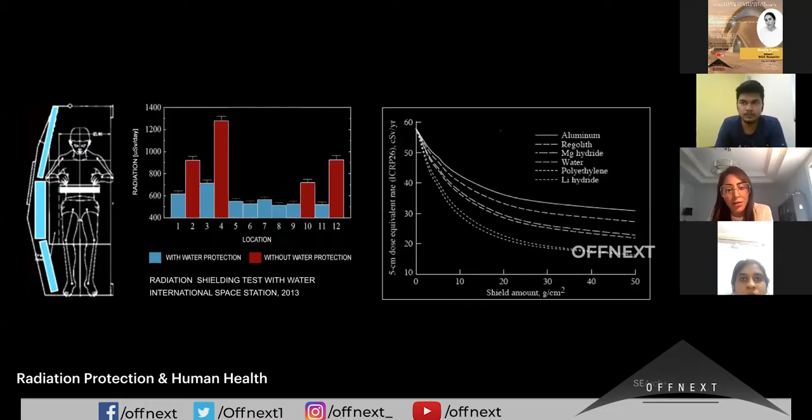So within the Mars Ice House concept, we introduced a vertically oriented lander that lands on the surface of Mars. We introduced two redundant ice shells that are 3D printed on the inside of an inflatable precision manufactured, we said it would be an ETFE membrane. And then from there, we introduced programming that sort of expanded from this central vertically oriented lander. And I will show you some of these areas now.

So at the very top floor, we introduced a wardroom and a galley. And we introduced a concept for vision windows where we can have thinner parts of the ice shell where the astronauts can look out to the Martian landscape. Here's a view of Ice House from the outside with a connection to the rover.

And let's see, this is showing what we conceived of to be the IBO, so the ice printing robot on the inside of the precision manufactured membrane, how it would actually go up and scale the inside of this inflatable membrane by printing consecutive rings that it could climb on top of. So it would essentially deposit the water ice as vapor, and it would cool on impact.

We did some very preliminary benchtop testing for this, and thanks to some collaboration that we did with McGill, we were able to produce small scale ice prototypes. But all of those included a binding material, so we weren't able to push the 3D printed ice concept much further at that time.

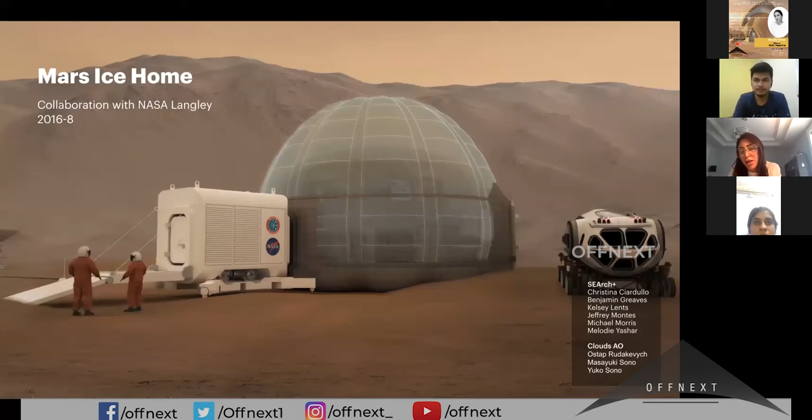Very fortunately for us, after winning the Phase 1 Centennial Challenge, we were able to be connected with a principal investigator at NASA Langley, who was interested in our project, but instead of pushing towards the additive manufacturing, the 3D printing component of the narrative, was interested in how we can introduce a more feasible concept in a shorter term time frame. So instead of it being 3D printed, it would be a filled and frozen ice habitat.

So together we came up with a concept essentially for vertically oriented ice shells that would be inflated and then filled by water ice, ISRU, which is in situ resource utilization water ice. And we came up with a program for the interior of the habitat where we have multiple restraint, bladder, and scuff layers for the inflatable, and we introduced an open floor plan that could be adapted, or adopted, to any number of missions on the surface of Mars.

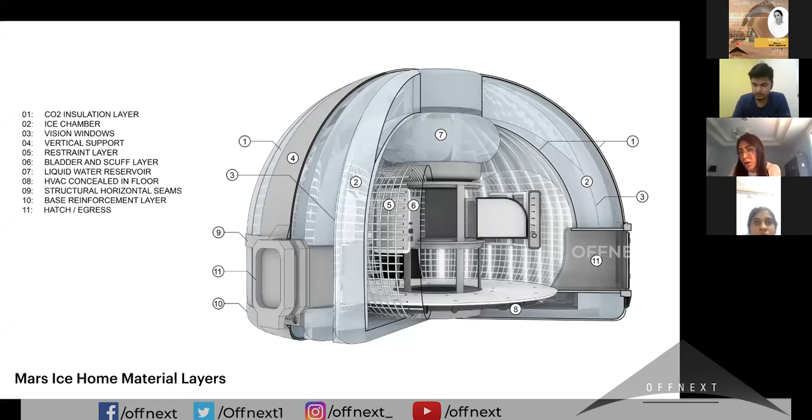This is a section showing the interior of Ice Home and some of the limited programming that we did for crew habitability. And very fortunately, thanks to some additional funding that we received, we were able to do some very basic benchtop tests to validate that filling and freezing ice within inflatable bags is a valid concept for a habitat.

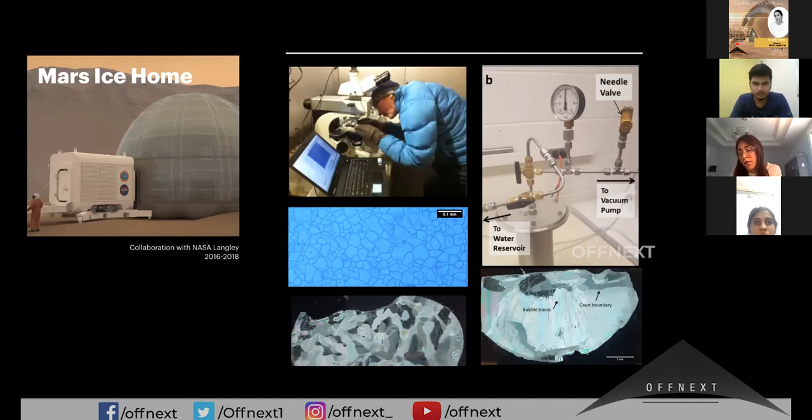So here Tess Caswell, a researcher that we worked with, who was at Brown at the time, was working within a Lamont laboratory, and she was able to fill and freeze water ice within Tedlar bags within a vacuum and validate that the ice grain that you see in this SEM imaging was actually mechanically strong enough to be self-supporting within the shell.

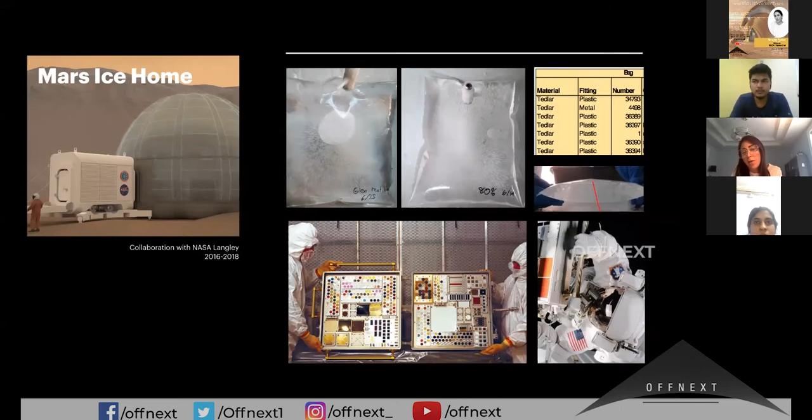There was also research done internally at NASA Langley, where ice was again filled and frozen within Tedlar bags with a number of fittings at the top of those bags. Some of them were plastic, some of them were metal. And as a result of some of these experiments, Mars Ice Home and some of the materials that were experimented with for Mars Ice Home were chosen to be part of the MISSE science experiment. That's the Materials International Space Station Experiment aboard ISS.

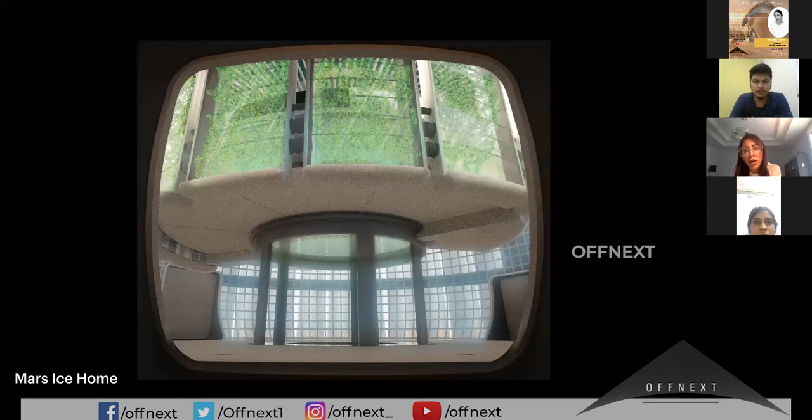This is a view of Mars Ice Home, the interior, where we showed a greenhouse concept on the second floor. As a result of that insinuation that there would be a greenhouse within Mars Ice Home, myself and my colleague Christina were asked to serve as organizers for NASA's Big Ideas Challenge.

And this was also a collaboration with NASA Langley, where we essentially took the concept for Ice Home and used it as a basis to conceive and put together a competition where student teams could think about how to introduce the deployment and concept of operations for a Mars greenhouse.

And there was some really amazing work and proposals that resulted from submissions to this competition, and one of them was worked on internally at Langley afterwards. So now I'll tell you a little bit about the Phase 3 NASA Centennial Challenge for a 3D printed habitat. Our version 1 submission, which is what you see on the left.

I'm sorry, can I have a question, please, before you pass this part? Oh, yeah, absolutely. I'm Elif from Turkey. I have a few questions, actually.

Hi. Yeah, sure. Hello. My question is not actually about designing and so on, but I really wonder about the working area of space architects. I also try to become an expert in space architecture, but I'm really new to this. But the thing is, let's say, for a space architect, where is the land of working? I mean, do we only follow the competitions? Or maybe I can simply explain like this.

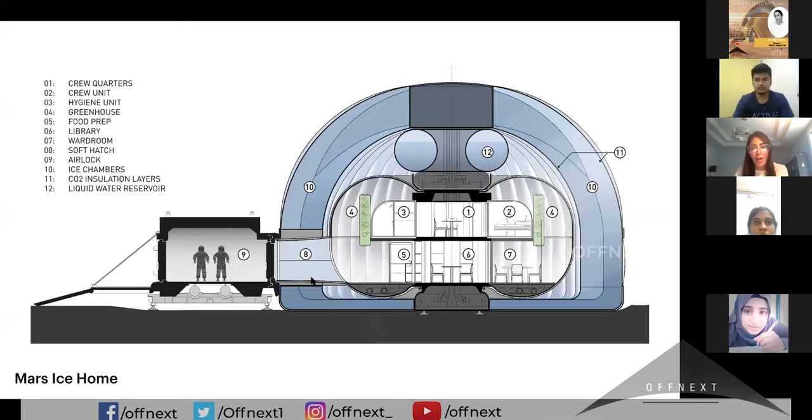I'm gonna go back to one of my earlier slides to talk about this. You're right that there's not an immediate need for a space architect in the same way that there's an immediate need for an architect designing low-income housing, for example, or an architect who might fulfill a certain role in developing a master plan within a developing city, or a city that's just getting off its feet.

But I think that this is what makes the field so interesting, is that it still has one foot in speculative process and speculative thinking, and one foot in realizing actual technologies. So it's a little bit of both. We can't say it's one or the other.

Certainly, if we think about this in terms of the economies of space architecture as a practice, no, it's not commercially profitable for anybody. You have to remember that Mars Ice House, the Deep Space Ice Home, Mars X House, the Mars Greenhouse Competition, and the second Mars X House, these were all done as a result of either a competition, meaning it was unfunded work, or it was work that was supporting another competition or an academic endeavor. So none of this was being sponsored by a direct client.

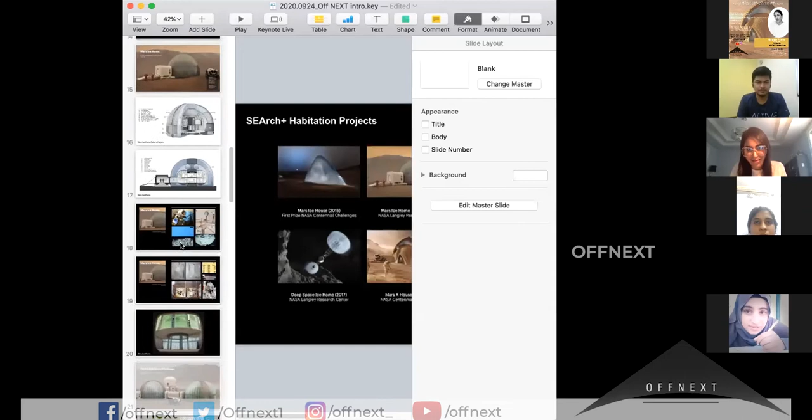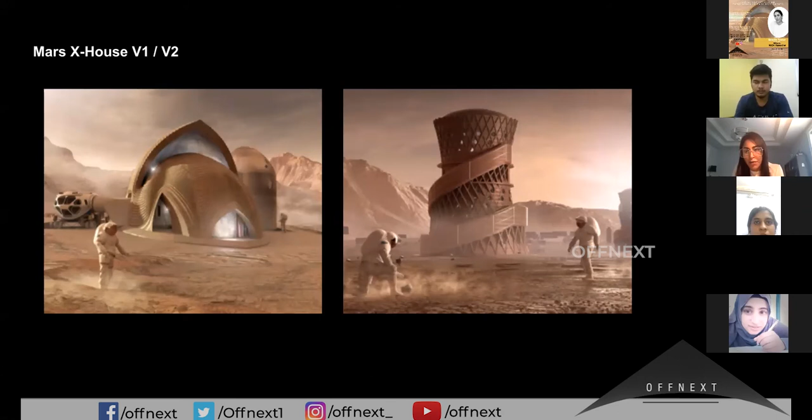So yeah, I'll tell you a little bit now about Mars X House version 1 and version 2. Version 1 won 4th place, and this was for 60% design, which was kind of a design checkpoint within the phase 3 3D printed habitat challenge. And then Mars X House version 2 on the right won 1st place for 100% design. So this is a rendering of Mars X House, which won 1st prize in phase 3 of the challenge. A view of a rover approaching Mars X House.

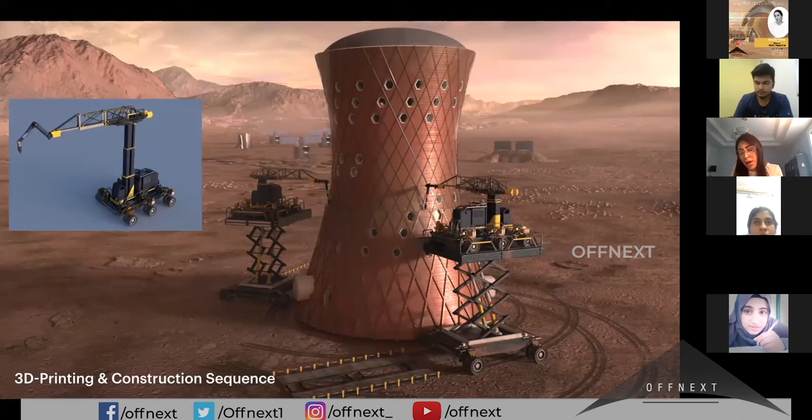And since we were collaborating with Apis Cor at the time, together we came up with a redesign of their current printer on a mobile platform, and here we're showing how the exterior regolith shell would have been constructed. And here we're showing how the interior high density polyethylene layers would be constructed. I'll tell you a little bit about the material system for the habitat in just a bit. Here though, you'll notice that we're showing on the upper right corner a deployed mechanical core, and we're also showing the high density polyethylene being printed.

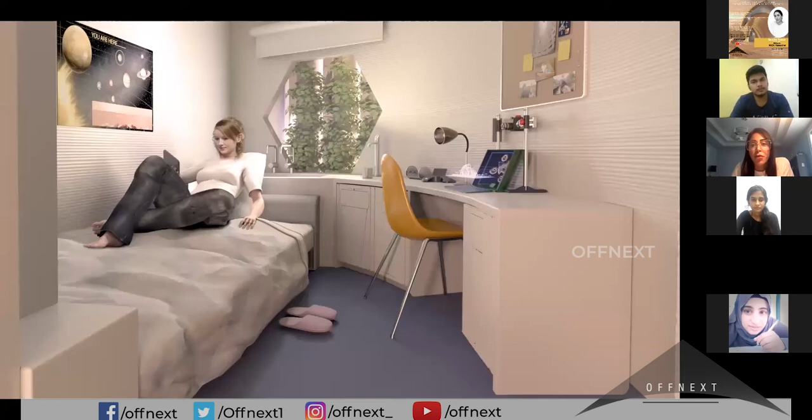We started off with this idea of a deployed mechanical core because it was essential for us to incorporate the ECLSS, which stands for Environmental Control and Life Support System, as integral within the habitat concept. So within this core, the ECLSS would be pre-integrated, mechanical equipment and hardware would be pre-integrated, such as experimental modules. And this was our main concept for how this could all happen autonomously and be deployed robotically. This is a view of the crew quarters on the inside of X House, and a view of the wardroom on the upper level of X House.

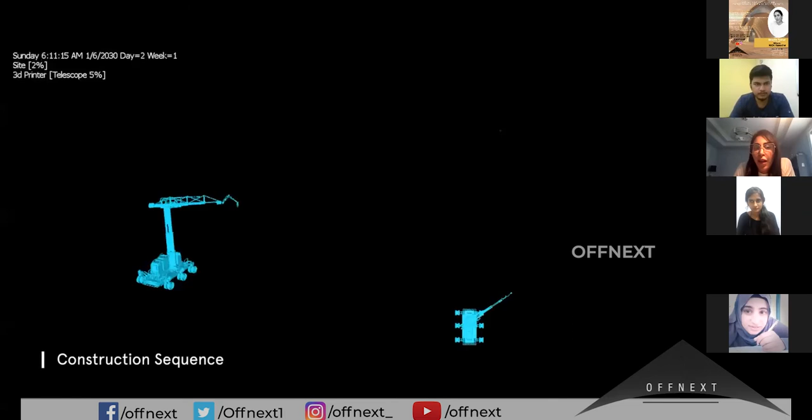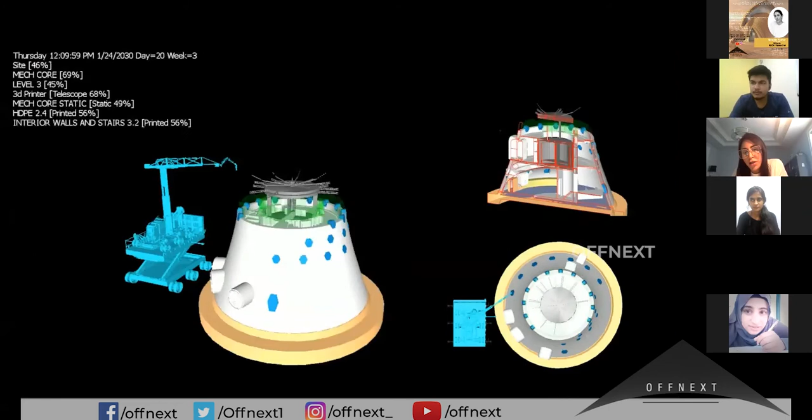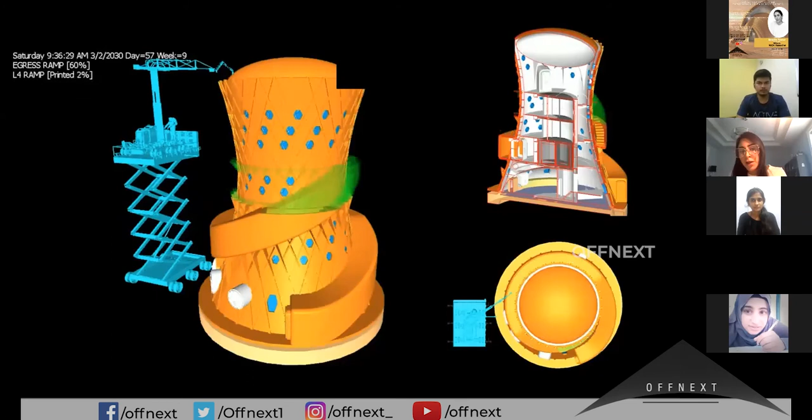This is a construction simulation where you'll see different parts of the X House project being constructed. So we started with a regolith foundation. First, we wanted to 3D print the high density polyethylene layers. The windows would be emplaced within the polyethylene layers first. And then the regolith shell would be 3D printed afterwards. So this orange is the regolith shell. We also introduced two types of basalt fiber reinforcement, circumferential hoop reinforcement, as well as diagonal reinforcement.

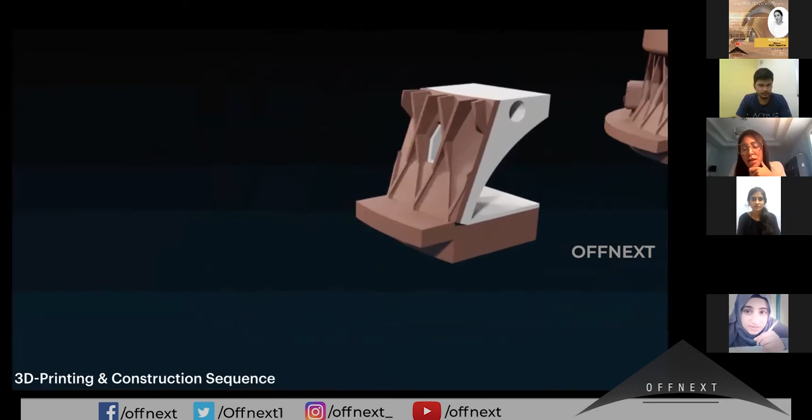And here you'll see an expanded view of the composite wall from Mars Ice House. On the far right, we have the high density polyethylene layers. This is to ensure that we have adequate radiation shielding for the astronauts. Polyethylene is a very good shielding material for passive shielding against radiation. And it's also safe to come into contact with and safe as an interface material for the astronauts.

Unprocessed regolith contains toxic perchlorates, which we know are going to be hazardous to human health, and that the astronauts should not come into close contact with. So we introduced the polyethylene layer as a way of creating that barrier between the unprocessed regolith on the outside and all of the hermetically sealed components on the inside of the habitat.

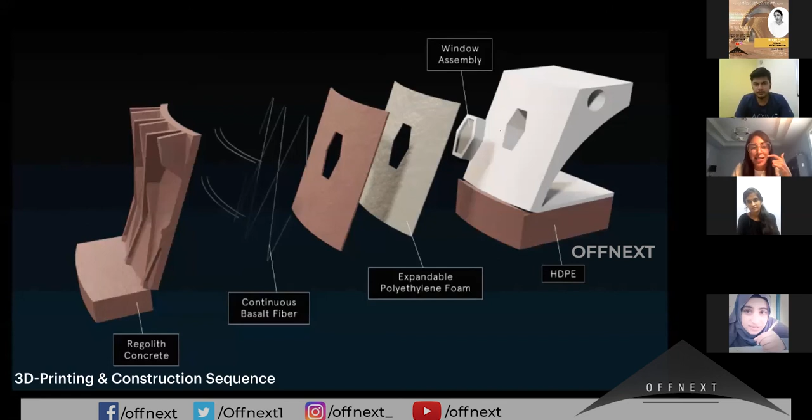We also introduced an expandable polyethylene foam, thinking about expansion and contraction of the material layers. And also, as I mentioned to you before, continuous basalt fiber reinforcement that would go in the diagonal direction, as well as the circumferential hoop reinforcement direction. And then on the far outside is the sulfur-based regolith concrete. And there you see it again.

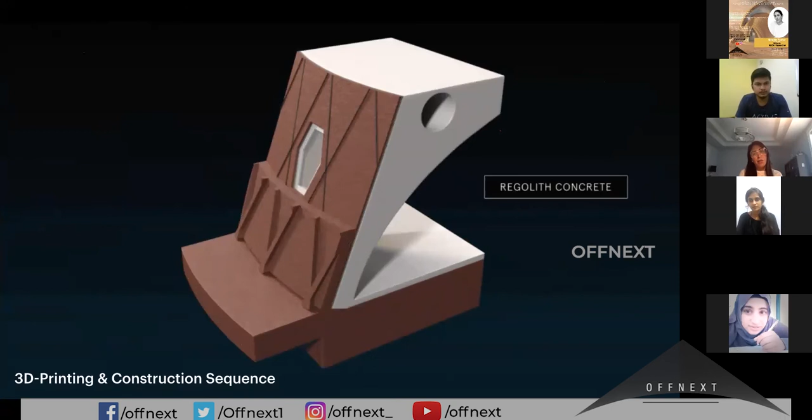And this is going to quickly show a small portion of the habitat and what the construction sequence would be. So first the foundation is printed, then the polyethylene layers, then the expandable foam, first layer of sulfur concrete, the reinforcement, and then the final layer of sulfur concrete.

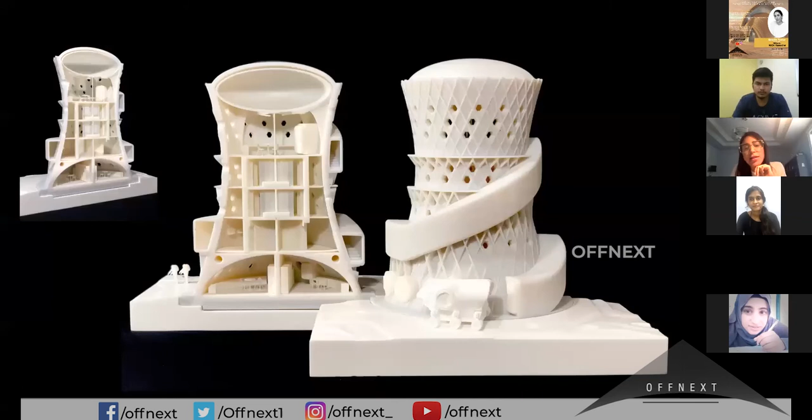This is a 3D printed model that we created for Mars Ice House, and this is on view, or at least it was on view, at the London Design Museum for the Moving to Mars exhibit. And this and the next video are showing, thanks to a residency that SEArch and AI SpaceFactory received within the Autodesk Build Space in Boston, basically how we 3D printed for construction level 2 of the phase 3 competition.

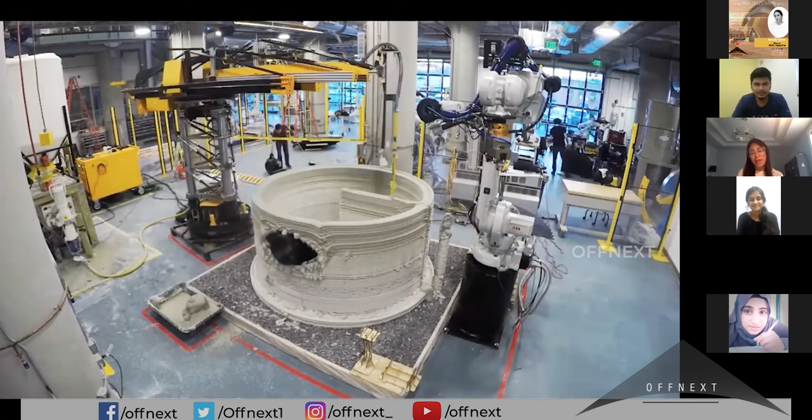And essentially what they asked us to do here is to 3D print this, what we called a water basin, and to robotically emplace, meaning lift and lower, 2 pipe elements, the small pipe and the big pipe, within the 3D printed structure over the course of the construction sequence. Even though this seems like a relatively simple thing, there were many problems that came into play. And this is just the beginning of how NASA and other companies are starting to think about robotic construction and how to integrate the emplacement of other elements within 3D printed structures.

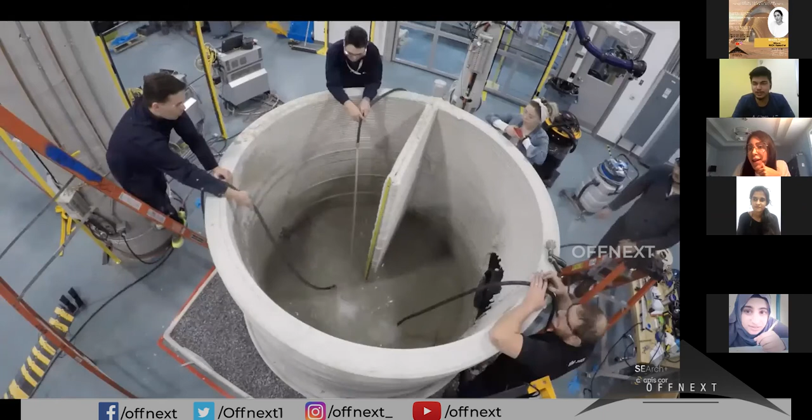So, sorry to interrupt, how much time did it take to complete this structure by the machines, by the robots? This structure, oh my gosh, I think the total construction time was something like 7 hours. 7 hours, yeah. So you see it sped up a lot in these videos.

So after we finished building the structure, it cured overnight, frankly, because we had a deadline to meet. And then we filled the structure up with 20 centimeters of water. And this was sufficient for us to win first place in the challenge. The idea here was that they wanted teams to demonstrate that 3D printed structures can actually be watertight, ahead of thinking about how they can be airtight to contain pressure and constant temperature for a sealed habitat.

I don't think any of the other teams, to my knowledge, were able to create a watertight barrier without caulking and sealing the structure manually, but we did none of that, and very fortunately for us, this was sufficient for us to win this part of the competition.

And now I'll tell you a little bit about our first real commercial contract with an aerospace company. And this was United Technologies Aerospace Systems. They had seen our work on Mars Ice House and some of our work afterwards, and they were very excited about the possibility of bringing designers on to think about how we can reimagine some of the hardware development that they were doing.

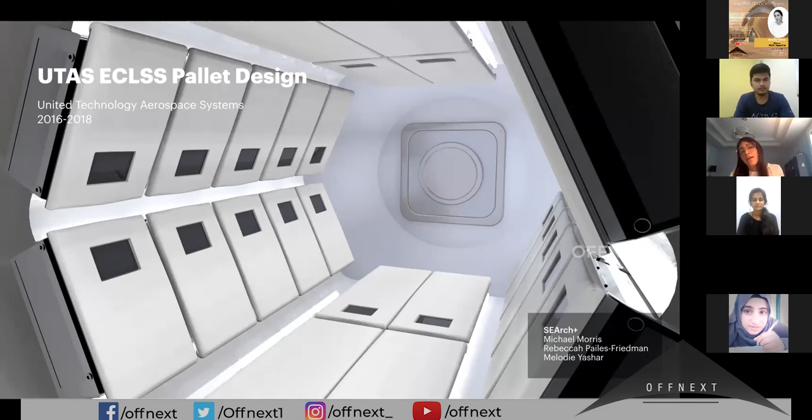So they came to us with this idea that they wanted to introduce a more, I guess you could say, coherent concept for how their hardware, their ECLSS hardware, which again is environmental control and life support systems hardware, could integrate with a number of habitat providers that are providing designs for NASA's Gateway program. And the project is part of the NextSTEP initiative, where NASA reached out to multiple aerospace companies to come up with habitat design concepts for Gateway and also for transit vehicles to Mars.

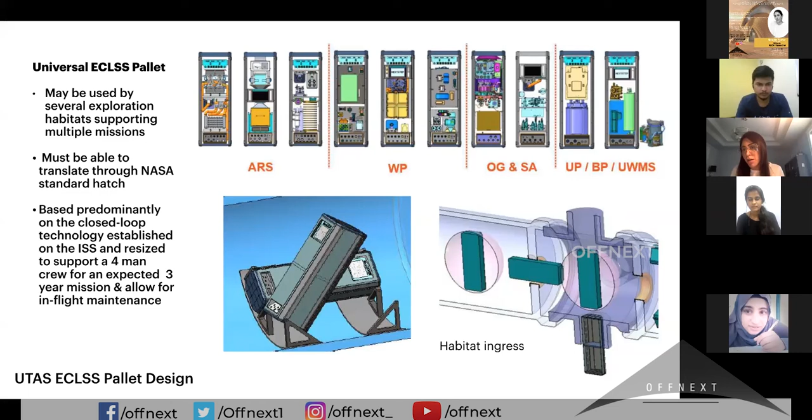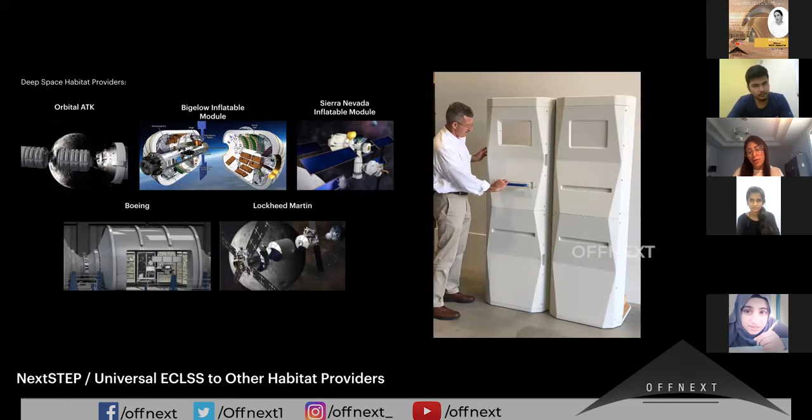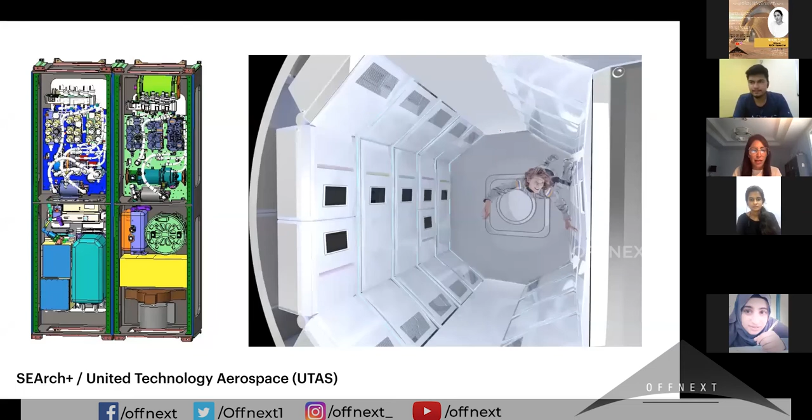Now I'm going to tell you a little bit about our current project, what I'm working on now. This is the Moon to Mars Planetary Autonomous Construction Technology project, which has been initiated by NASA Marshall Space Flight Center and is a collaboration amongst private and academic partners, such as Icon 3D, who is our client at the moment, and other industry as well as university partners like the Colorado School of Mines.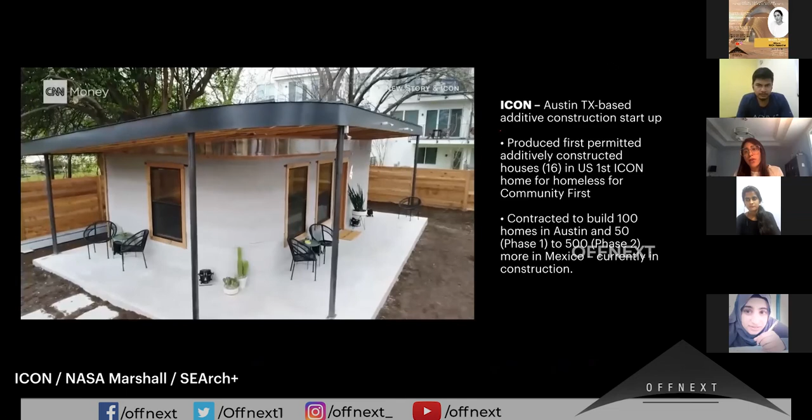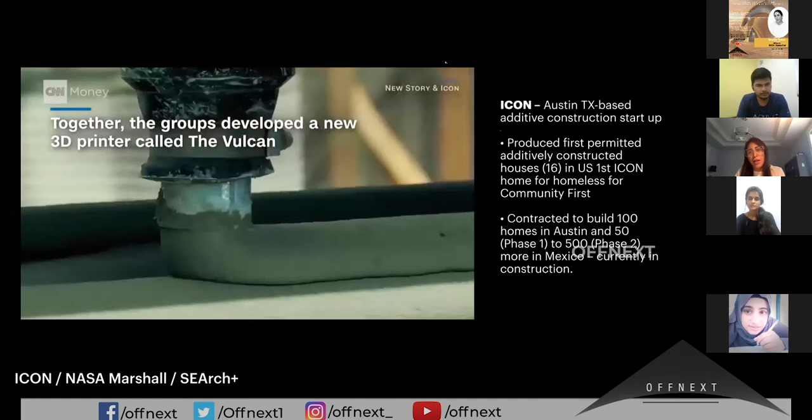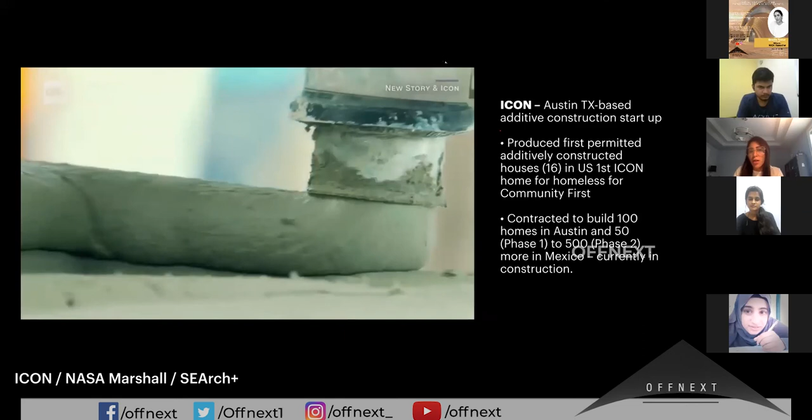Icon is the first U.S. company to have a permitted additively constructed house in the United States, and they do lots of work for development of homeless shelters and homeless housing, and frankly, they are leading the way in developing 3D printed concrete structures terrestrially, and I believe have printed the most number of structures in Austin, Texas, and in Mexico out of any construction design build company in the world.

So together we were connected through NASA Marshall, and we put together a list of requirements for Earth-based as well as lunar-based construction, and we were interested in introducing dual use benefit not only for terrestrial construction but also in the long term for space. So this led to a set of shared functional requirements to benefit the goals of NASA, Icon, the Department of Defense, and SEArch+. Below you'll see some of the requirements that we came up with for the autonomous construction system. Some of these have to do with design for field repairability, dust mitigation, shielding, ballistic protection, and the list goes on.

The overall goal of the MMPACT project is to demonstrate autonomous construction technologies on the surface of the moon in an effort to introduce a permanent settlement and a permanent lunar outpost on the moon within the 2020s decade. So first, we're going to start to develop horizontal structures such as landing pads and roadways. And then eventually we will start to develop collaboratively vertical structures, so habitats, blast walls, and other infrastructure elements on the moon. This is going to be a long process, and it's going to take a lot for us to get to where we need to be,

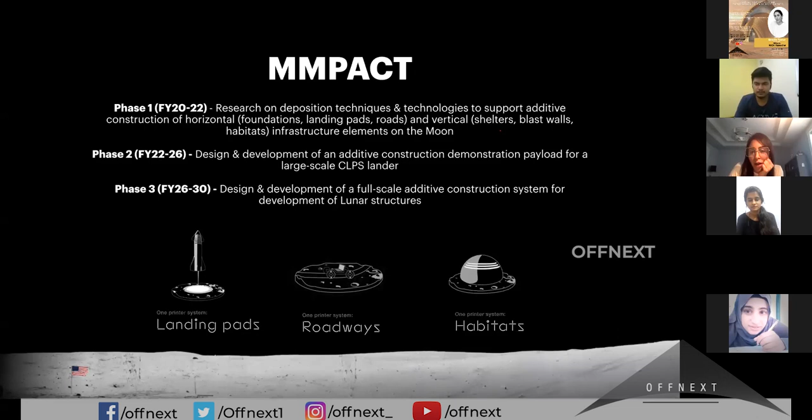We recognize that 3D printing is possibly one of the more challenging building construction concepts relative to creating a sustainable presence on the moon. We know that there are simpler ways of doing this, and yet we're very committed to the development of additively constructed structures because we feel it's going to lead to exponential development of lunar infrastructure and eventually Martian infrastructure using only the resources available on the planet, which is something that would not be sustainable using our current rocket propulsion technology because it's prohibitively expensive to launch everything from Earth.

So even though we know that we can launch, for example, what's referred to in research as a class 1 habitat, so a hard shell habitat module, or an inflatable habitat that deploys on the surface, we are very committed to developing 3D printed structures on the moon and Mars because it supports the vision of a long-term sustainable presence on that planet.

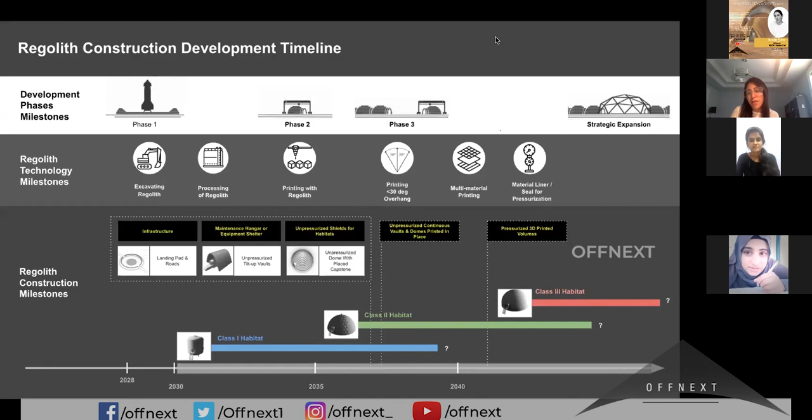And this is a kind of sneak peek of some of the design work that we've been developing with NASA and with Icon 3D. So here you'll see some of the landing pads that we've introduced. And that's what I have prepared for you.

Oh, good. And there's still some time for questions, which is